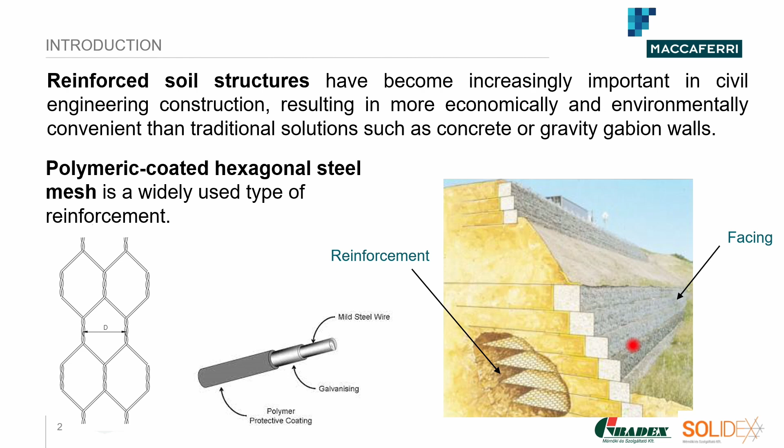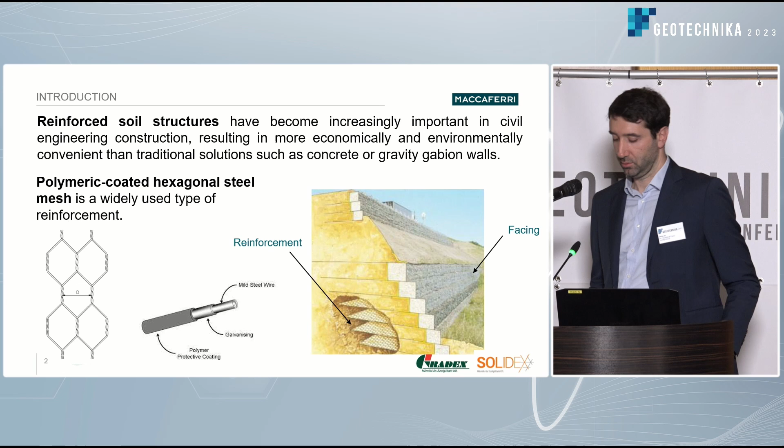The concept is to have elements which have a facing, and a reinforcement part to stabilize the soil, connected to the facing.

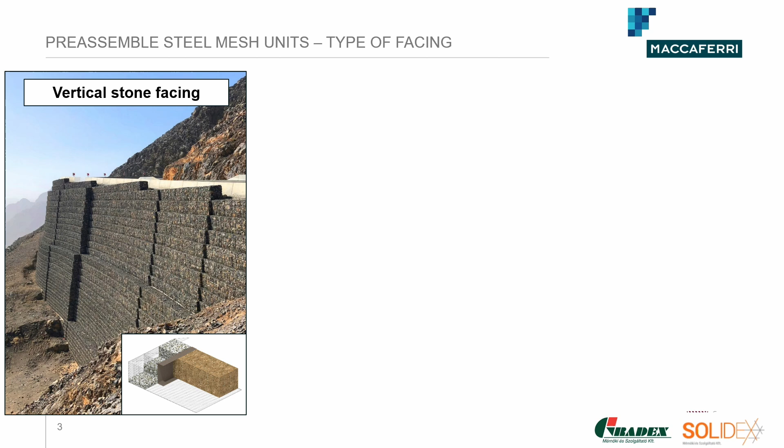Different kinds of facing can be built, such as vertical stone facing like gabion.

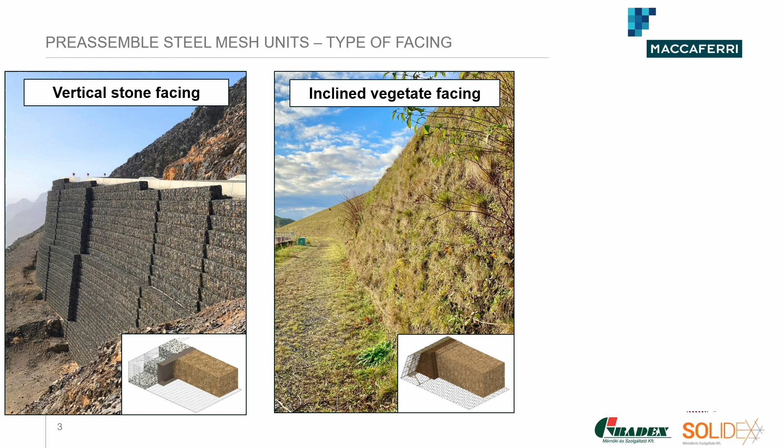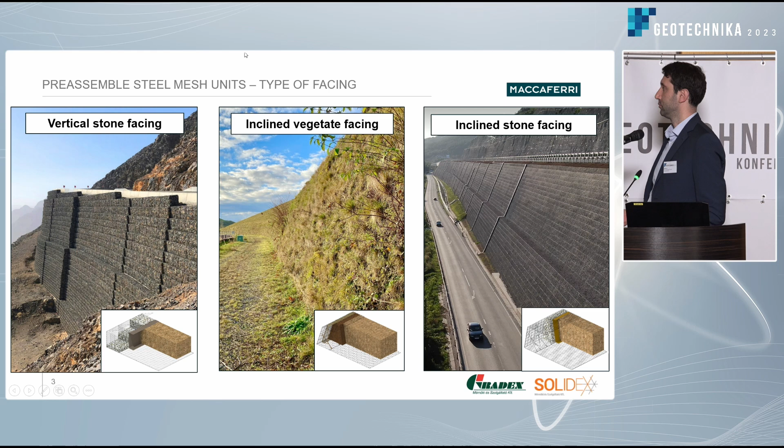And when the aesthetic purpose requires it, we build an inclined retaining wall with stone facing. So those units are made this way for vertical gabion facing.

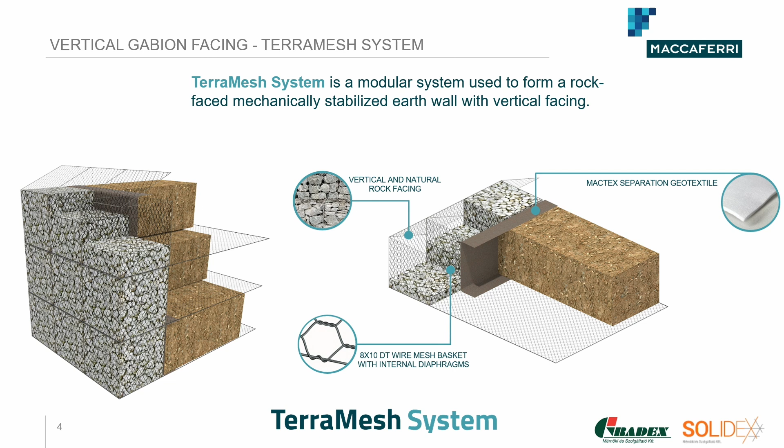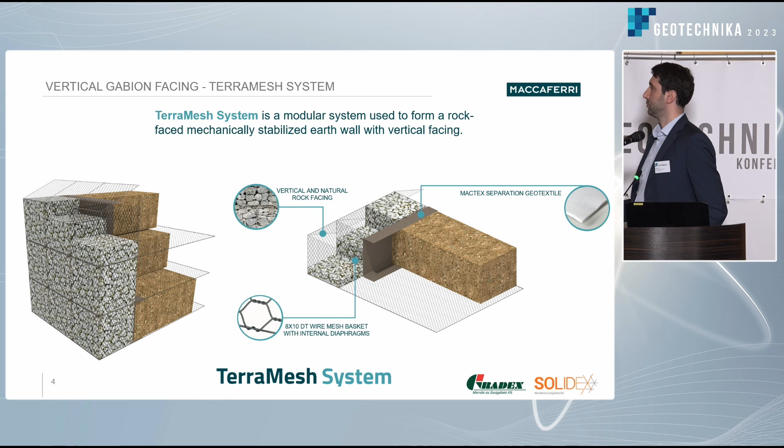A geotextile is also always needed here for separation between the backfill and the stone filling.

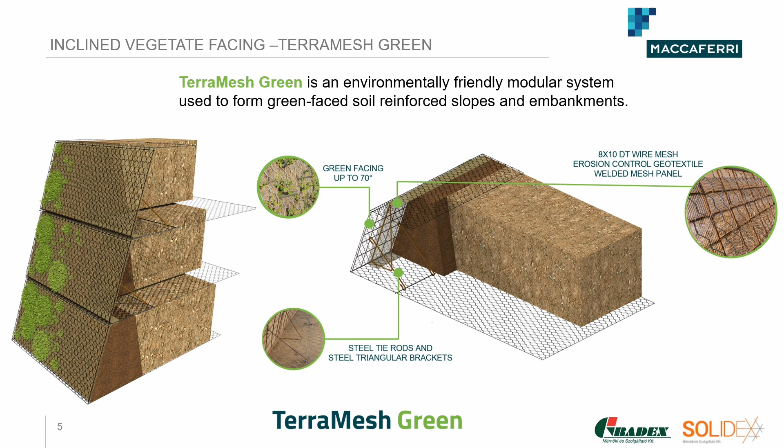In the facing, an additional welded mesh panel, ties and triangles are used to keep the inclination of the facing in position.

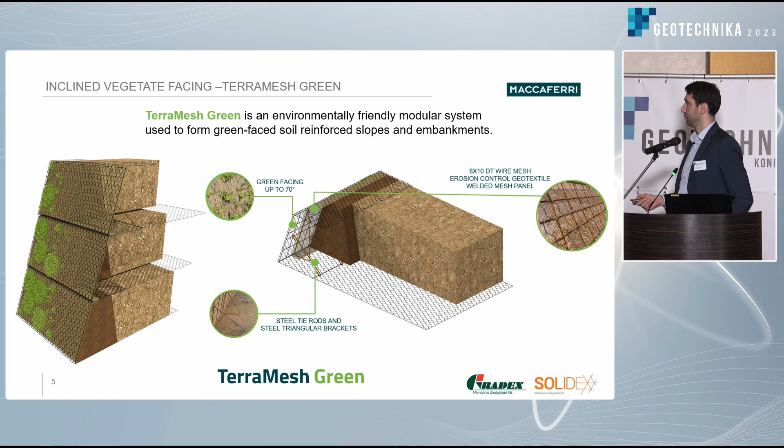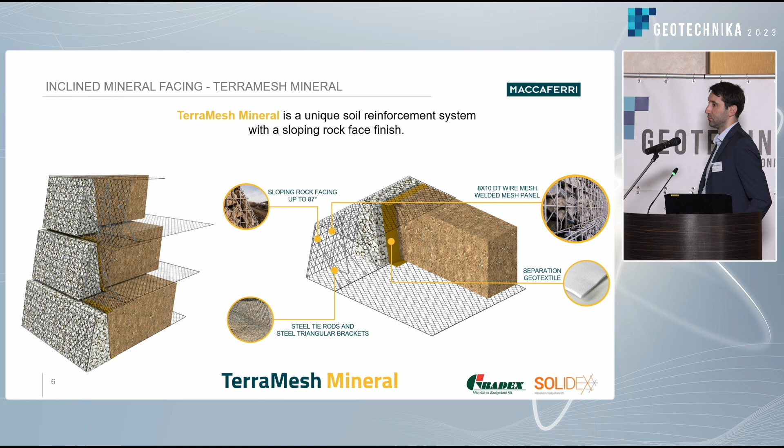The version with stone facing is very similar. The only difference is that the panel at the front is hot dip galvanized for aesthetical reasons, with a hot-dip galvanized auxiliary reinforcing grid built into the facing.

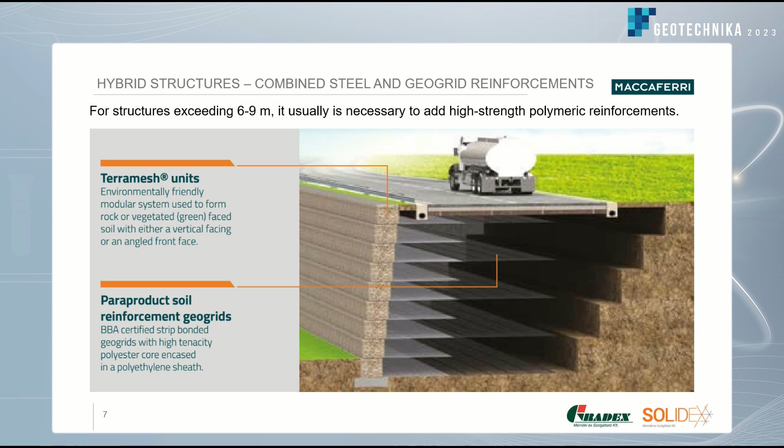For structures exceeding 6-9 meters of height, it is usually necessary to integrate with high strength geogrid as horizontal reinforcement elements.

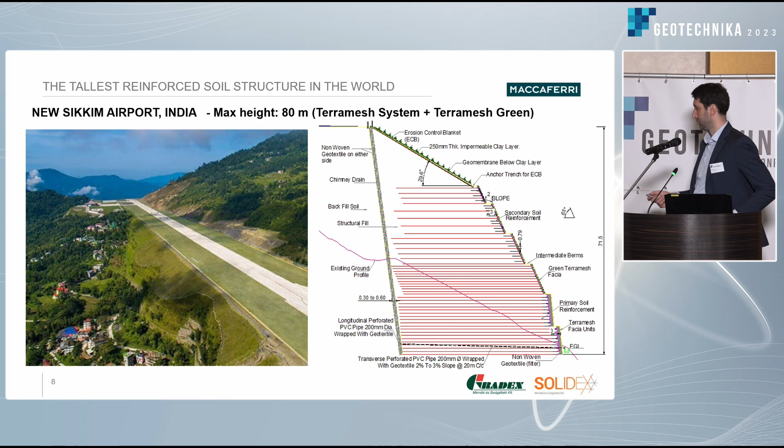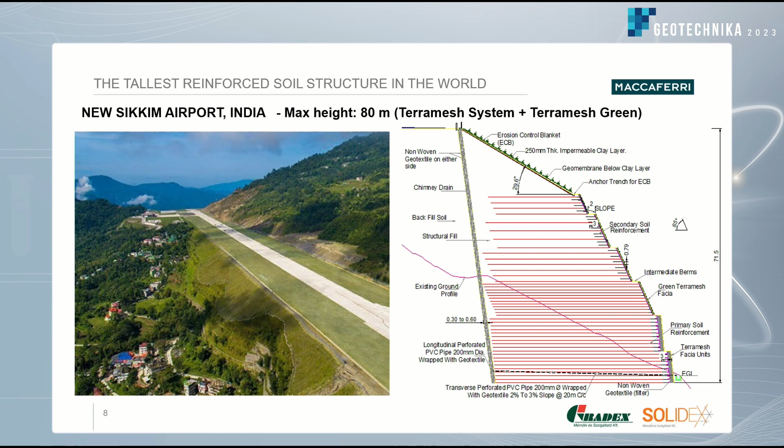With this technology has been built the tallest reinforced soil structure in the world. It is an airport in India and it is 80 meters tall.

And also the tallest such structure in Europe, located in Albania, is 37 meters tall at its highest point.

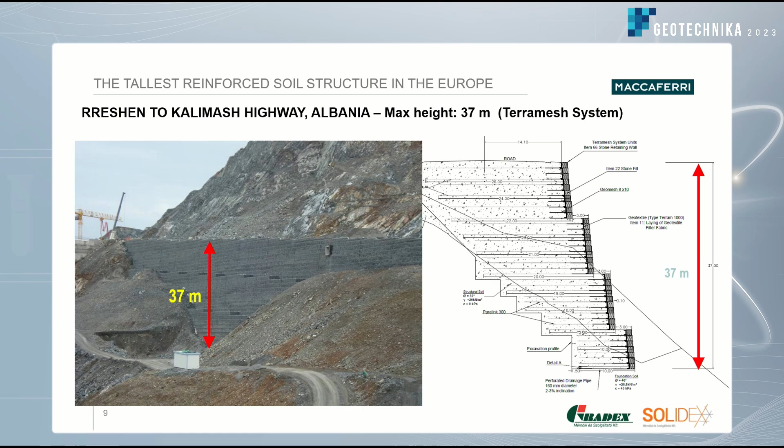What about the product certification in the European Union? Let's talk about the required product certification in the European Union.

Each manufacturer must obtain a European Technical Assessment, ETA.

And consequently can obtain the CE mark on the product.

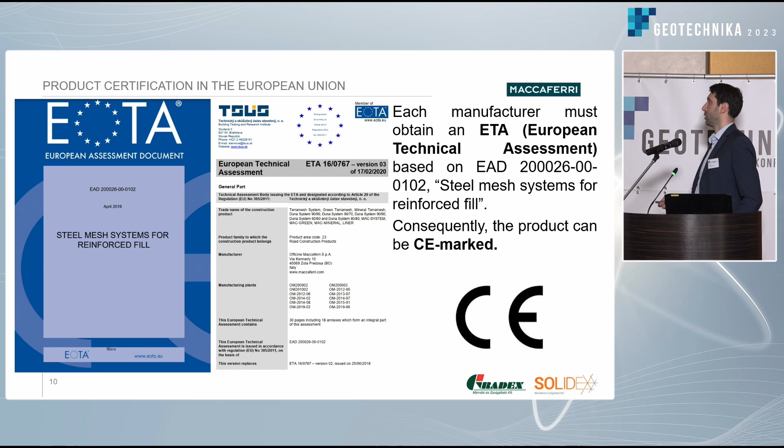About durability, the design life of steel wire products is defined according to a specific norm and standard requirements.

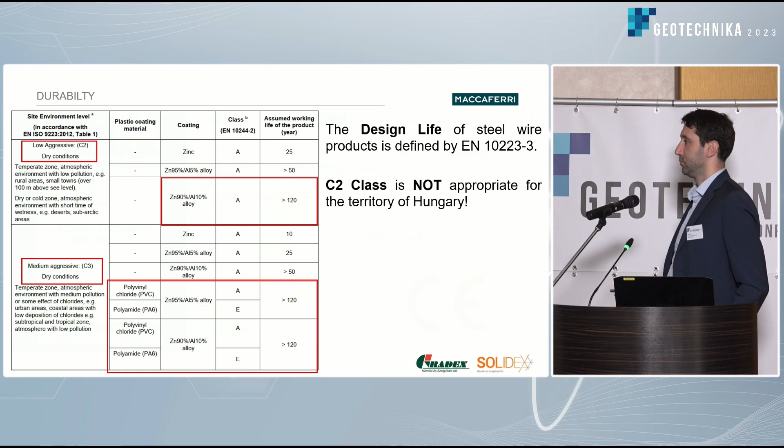From the distance it is in small letters, but the message is for long-term durability: it is always required to have polymeric coated, hot-dip galvanized wire mesh structures.

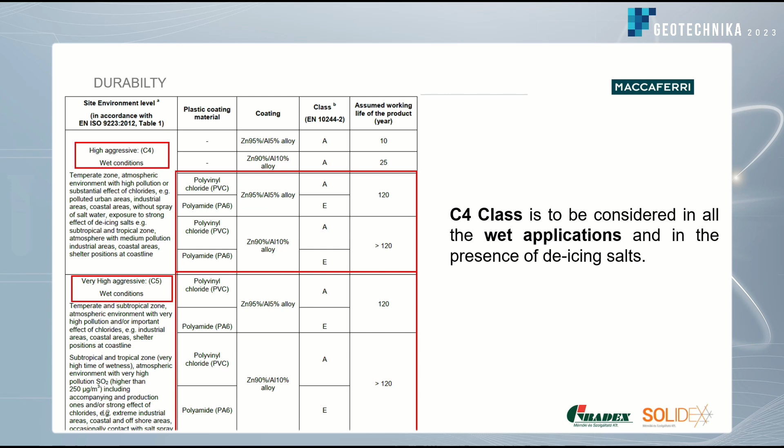Now the classes are defined in terms of between C2 and C5, based on soil aggressivity. The most proper class to be used, for example for infrastructures, is C4, that is the high aggressive class, which is typically characteristic for built structures.

Normative situation, state of the art. The standards which regulate the design of these structures - still in place is Eurocode 7, Geotechnical Design, issued in 2004.

But at that time it did not include a chapter or instruction for the design of reinforced soil structures, and no clear indication how to implement geosynthetics and steel reinforced mesh.

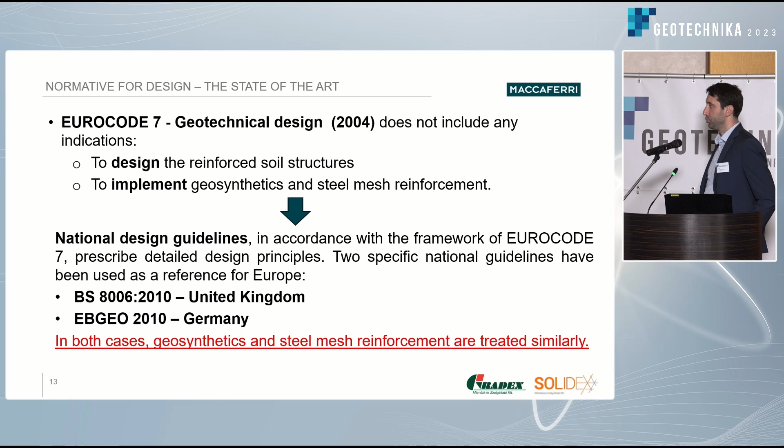Due to this normative gap, two special national guidelines have been issued and used as a reference in all Europe, within the boundaries of Eurocode principles: BS 8006 from the United Kingdom and EBGEO 2010 from Germany.

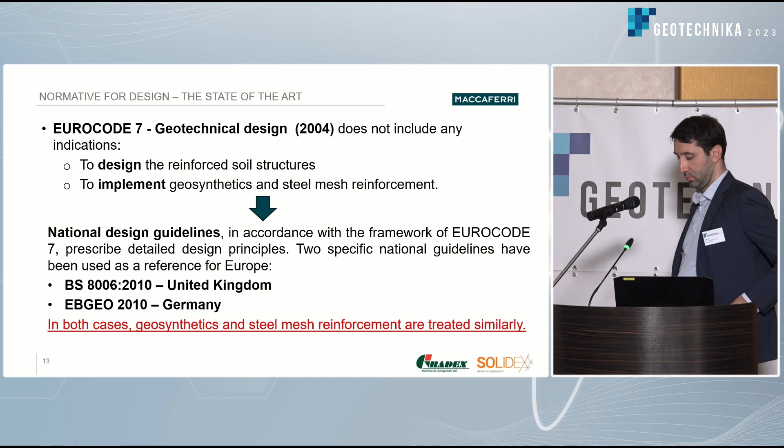They deal with geosynthetics and steel mesh reinforcement very similarly.

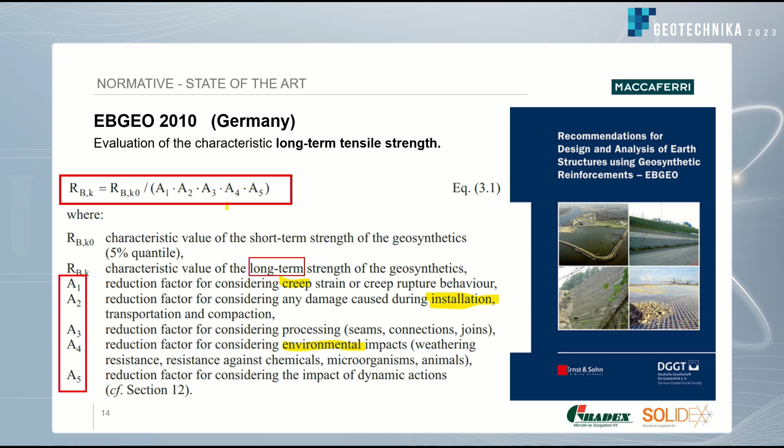The logic is that there is the definition of a long-term strength of the reinforcement, which is obtained from the tested short-term resistance of the material, by reducing this value with some coefficient, to take into account creep effect, installation damage, and environmental impact.

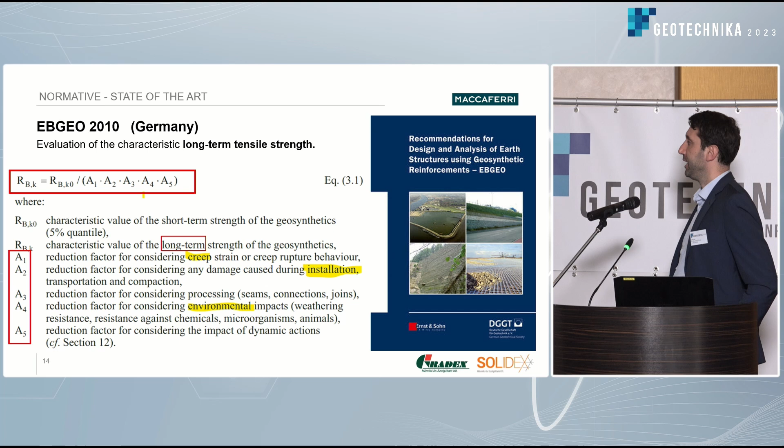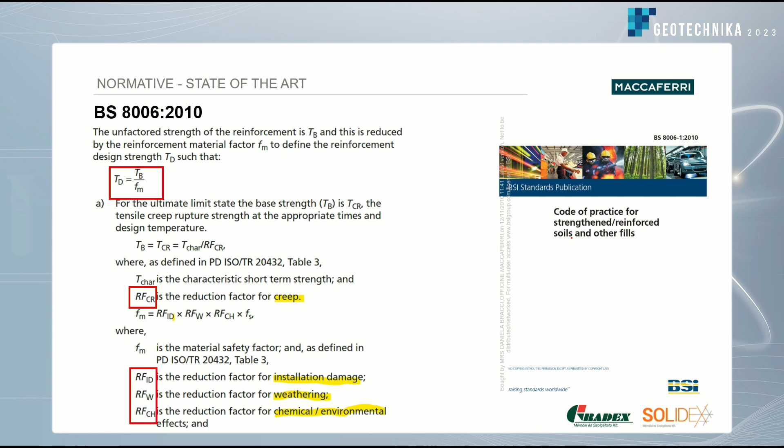That was EBGEO. This is the same with a different letter from BS 8006. Again we can see reduction factors for creep, installation damage, weathering, and chemical environmental effects.

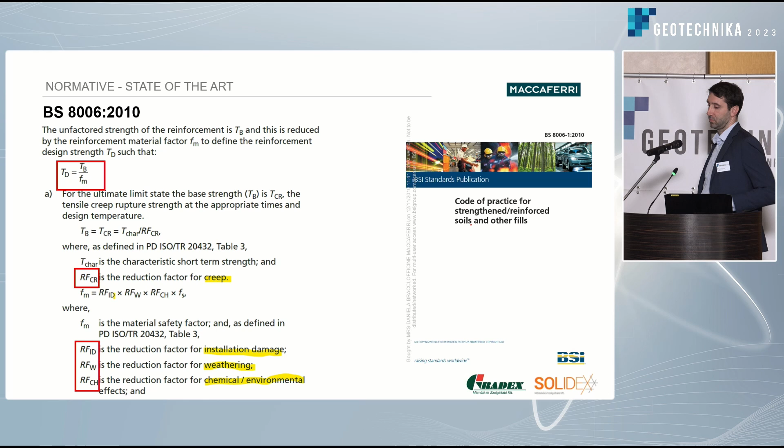Now, what is new is that in 2024 the new Eurocode 7 will be issued. This update of the norm will include both geosynthetics and also steel mesh reinforcement.

The differences are mainly two in the way they will be treated. Polymeric geosynthetics suffer from creep, steel doesn't.

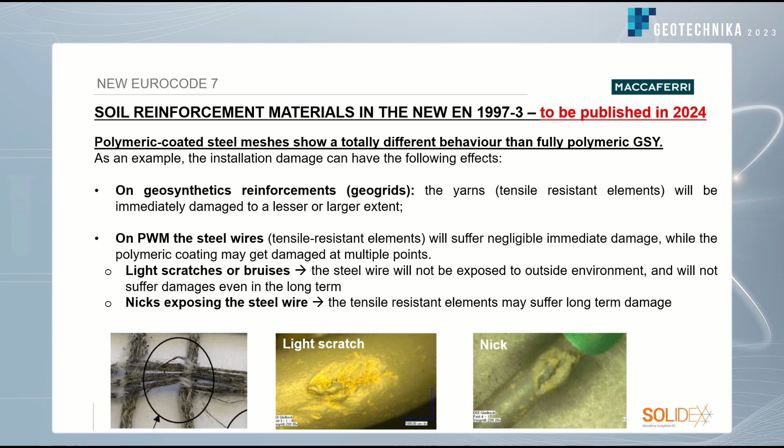Geogrids, woven geogrids, when they suffer damage during installation, the reduction in strength is immediate. The damage on steel mesh is only on the coating, so the reduction in strength occurs only after a long term.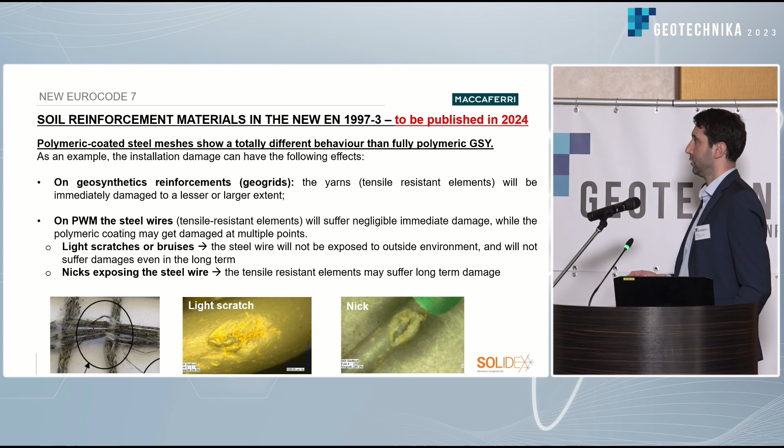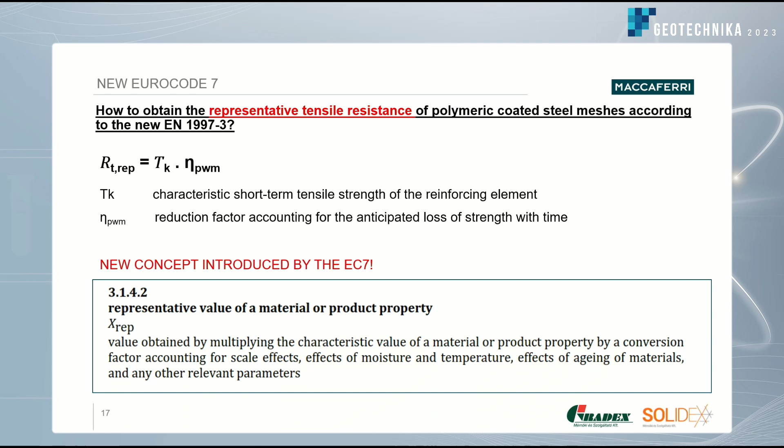So the new concept of representative value of a material is introduced in the new Eurocode.

For each material, this representative value is the product between the short-term tensile strength value, the one obtained from a tensile test, multiplied by a factor that takes into account the anticipated loss of strength with time.

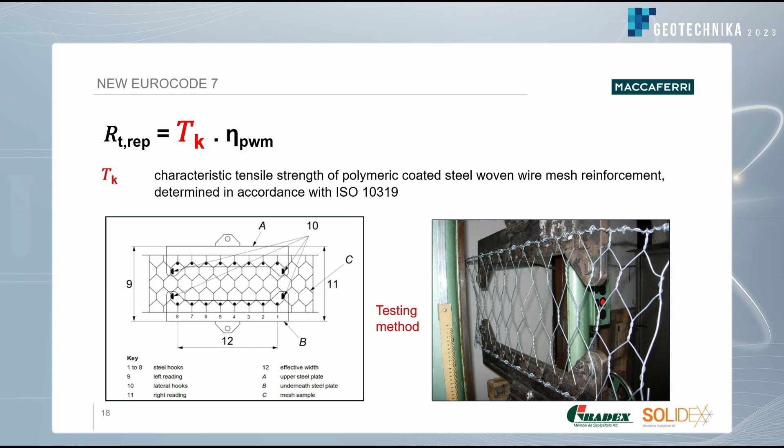And the testing procedure is described in the norm, of course.

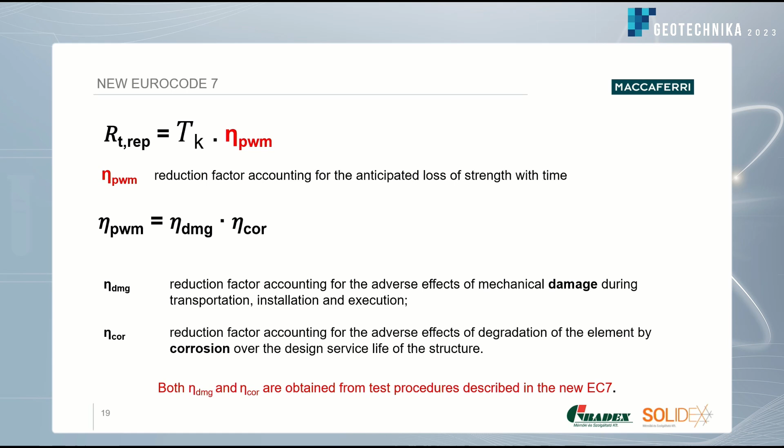The other factor reducing the characteristic value is the product of two different effects: mechanical damage during transportation, installation and implementation in the project, and the adverse effect of degradation due to corrosion during the design life of the structure.

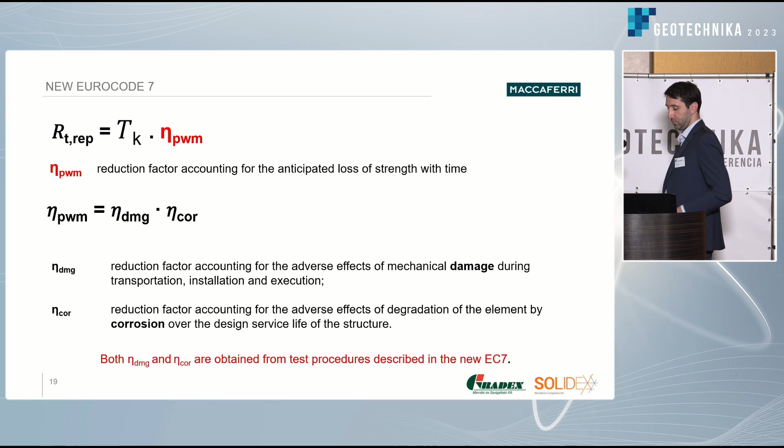Clear procedures for their evaluation are described in the new Eurocode.

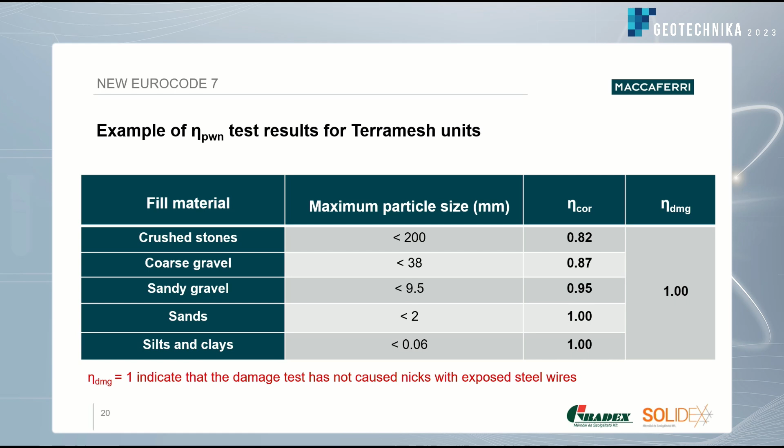A quick comment about the guidelines issued by neighboring countries like Czech Republic and Slovakia, again to fill the normative gap that existed due to the incompleteness of the previous Eurocode.

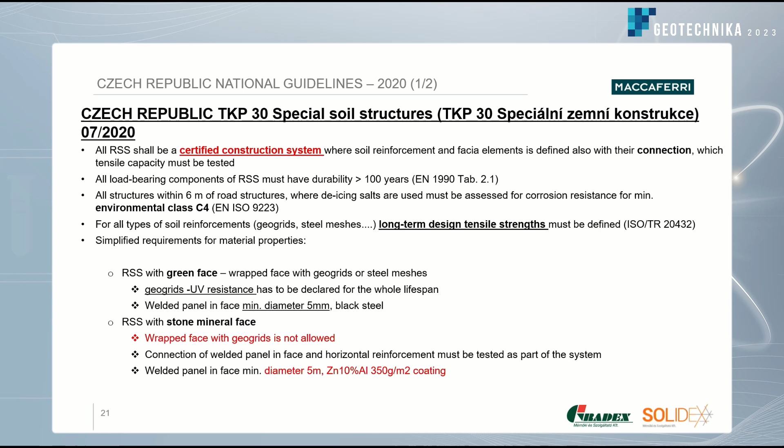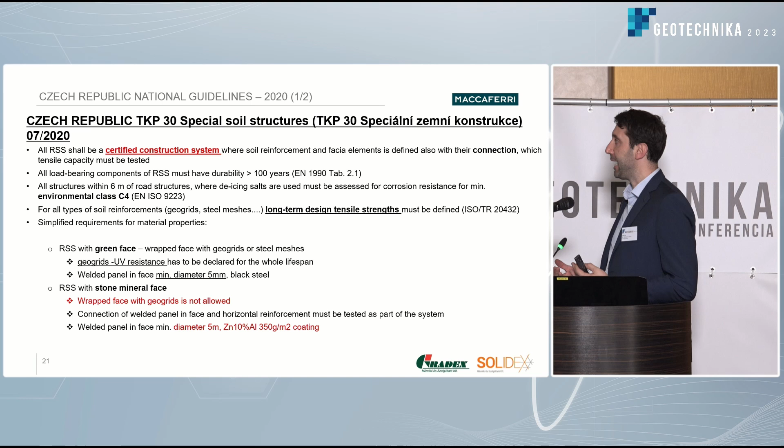Then all the elements composing the system should be proven for a durability higher or equal to 100 years.

Also, in the proximity of 6 meters to the road structure, the environmental class is C4, meaning highly aggressive because of the impact of de-icing salt normally used in winter.

Again, the resistance of each component should be considered in long-term terms, accounting for all degradation effects over time, such as creep, installation damage, etc., which must be taken into account for every element of the system.

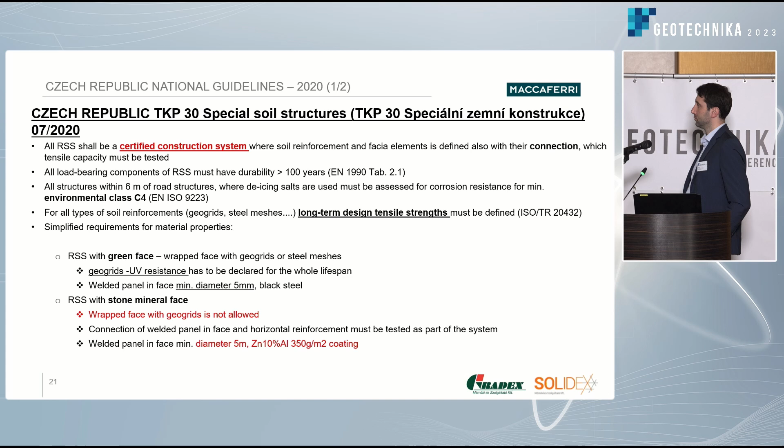As a result of all these requirements, for reinforced soil structures with green facing, it is required to prove the UV resistance of the polymeric geogrids in the facing for the entire structural lifetime.

For reinforced structures with mineral facing, facing with geogrids exposed to the environment and sun is not allowed. For stone or gabion-faced structures, it is forbidden to use geosynthetics where they would be exposed to UV radiation.

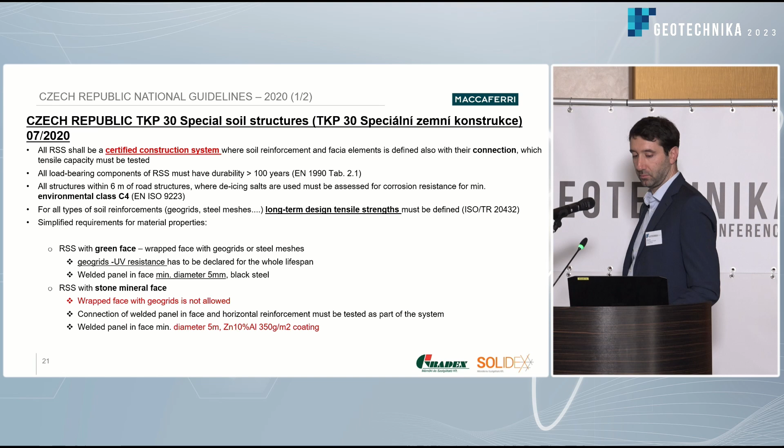The efficiency between the facing elements, gabions or whatever, and the reinforcement should be proven.

In addition, I would like to highlight that authorities have made a requirement in terms of corrosion protection to use the best possible available materials in the market.

This means that for welded gabions in Czech Republic, a zinc-aluminum 10% alloy metallic coating is required, at a minimum thickness of 350 g/m² for welded steel facing structures.

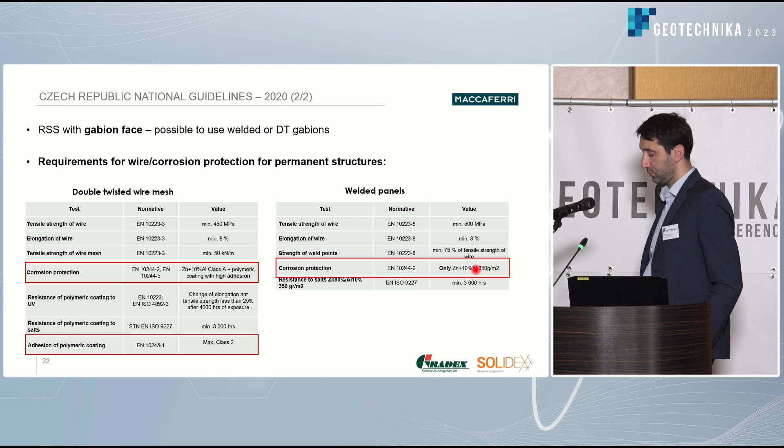For double twisted wire mesh, the coating should be zinc-aluminum 10% alloy plus a high adhesion polymeric coating. This is a very demanding requirement.

There are only 2 producers in the world capable of producing this quality of wire.

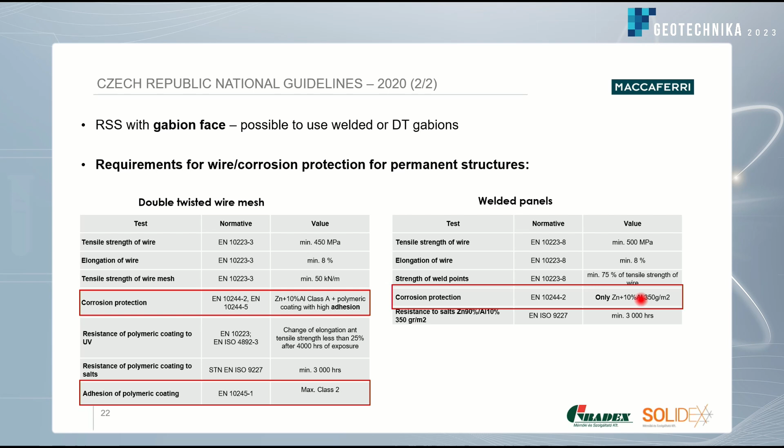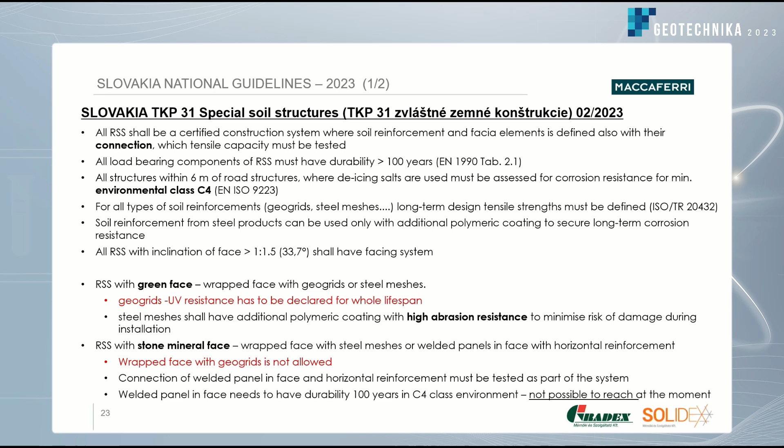A very similar approach applies in Slovakia. I can only add the requirement that in Slovakia, when the inclination of the slope exceeds 1:1.5, that is about 33.7 degrees, facing elements are required.

Also in Slovakia, a high abrasion resistance polymeric coating is required on the installed reinforcement elements, to minimize the risk of damage during installation.

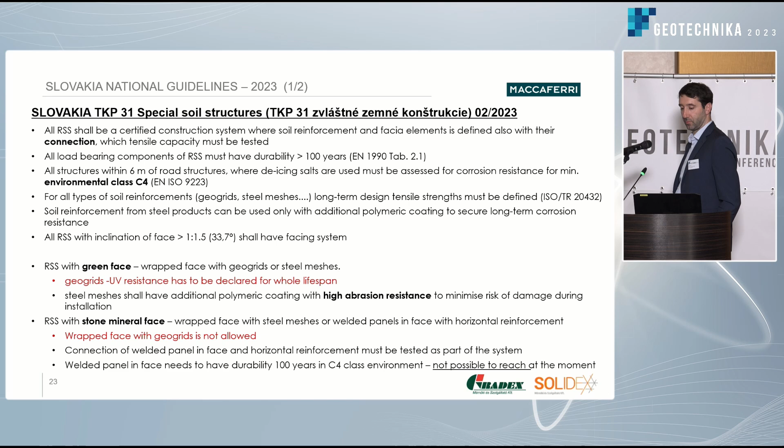So, let's now see what was done in Hungary.

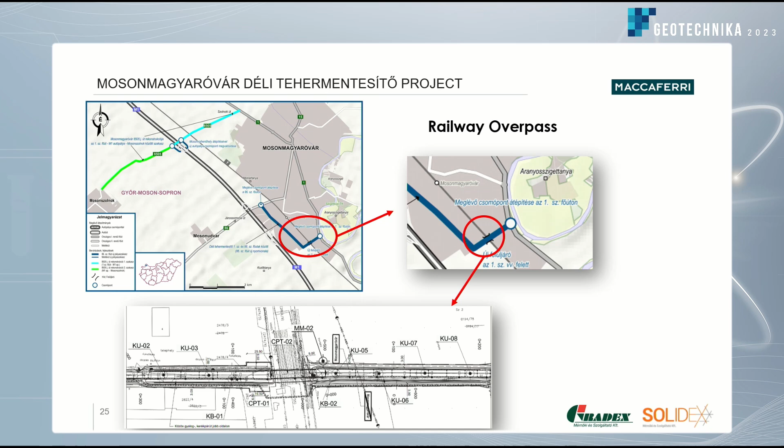In 2022, together with our partners Solidex and Gradex, we delivered a project in Mosonmagyaróvár, for the southern bypass.

From general to particular, here there is the road overpassing the railway. This is the road that passes above the existing railway line.

Here we have a ramp, an overpass made of a ramp, a vertical wall with a ramp. A concrete bridge, and then a ramp to go down.

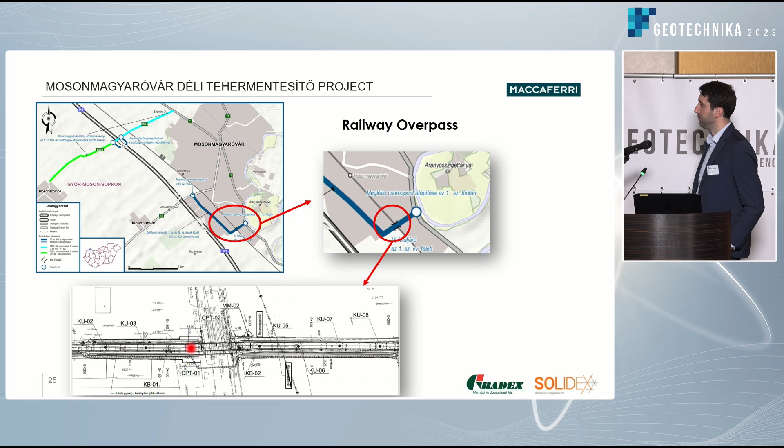Yeah, here we see it better. This is the two sides of the same ramp.

One ramp was 120 meters long, maximum height 11 meters. The second one is 175 meters.

In orange you can see highlighted the face, the gabion facing of the structure.

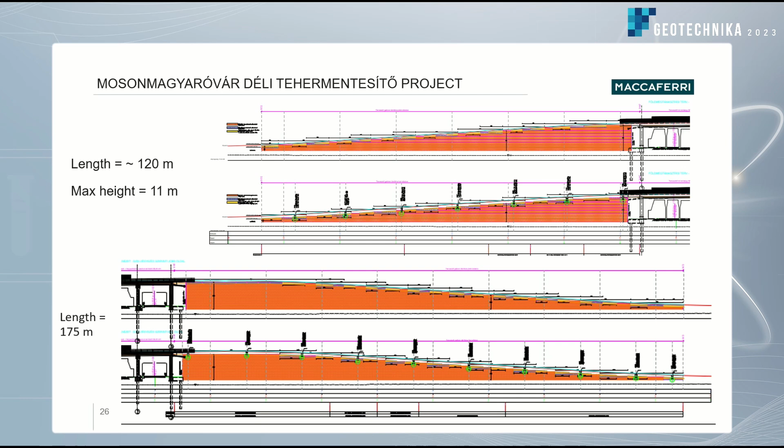This is the typical cross section.

Terramesh system, these gabion facing elements with steel reinforcement mesh, plus geogrid crossing the structure from one side to the other.

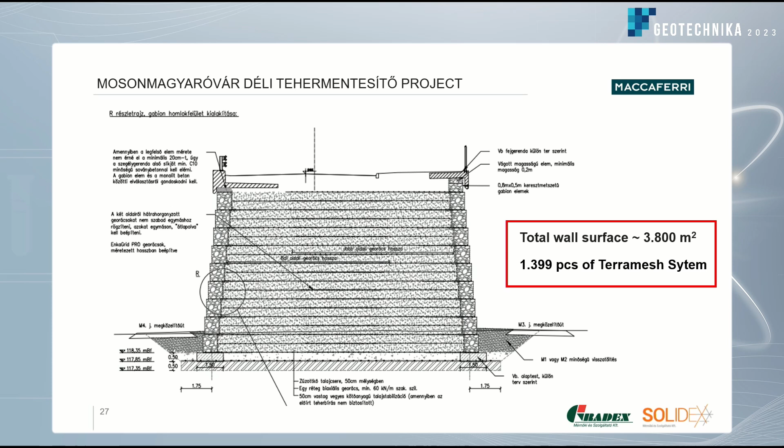The total wall surface amounted to 3,800 square meters, and almost 1,400 pieces of the Terramesh system.

This is the sketch of the units used for construction. Most of the units were 3 meters wide.

The gabion box 80 centimeters wide, the length of the reinforcement 2.5 meters, and 1 meter high.

With a partition of the box inside the box every meter. Here the detail of the reinforcement.

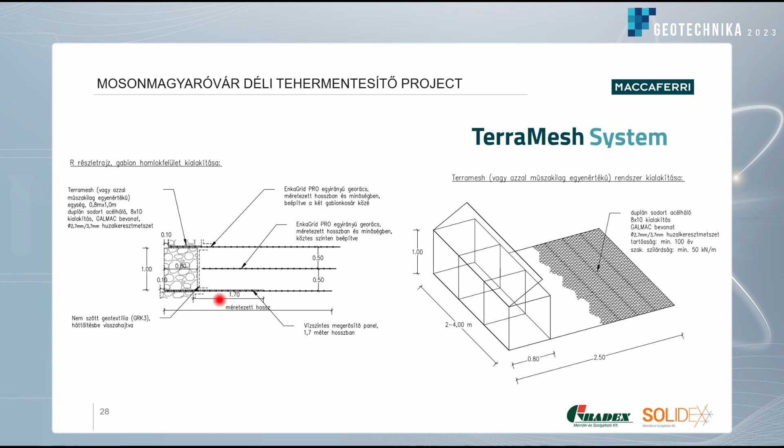This is 1 meter, on the 1 meter high facing. Here we have the gabion box. We don't see it well, but here at the bottom there is the steel mesh.

And this thicker one is the geogrid, that passes below the elements, reaching out to the facing.

And here, where of course the element is 1 meter, it arrives just against the box, while the intermediate geogrid only reaches the back wall.

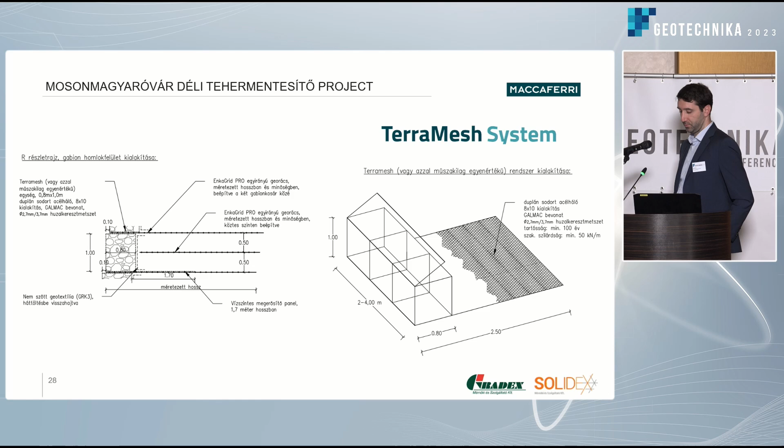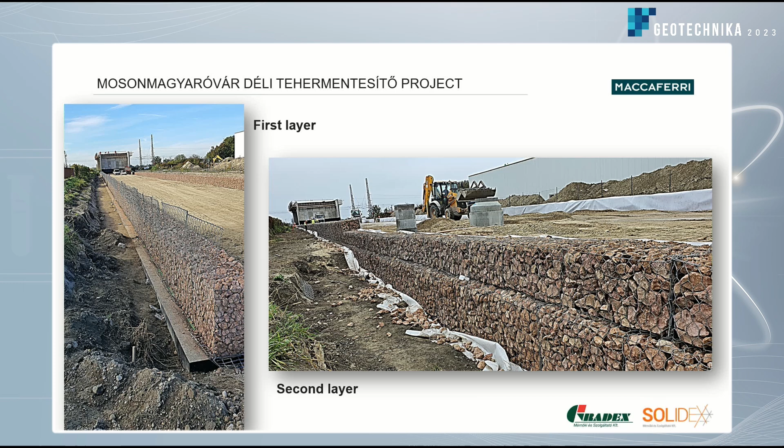Here you can see the concrete bridge support structure. You can also see the geotextile that is used to separate the stone from the fine filling of the bank.

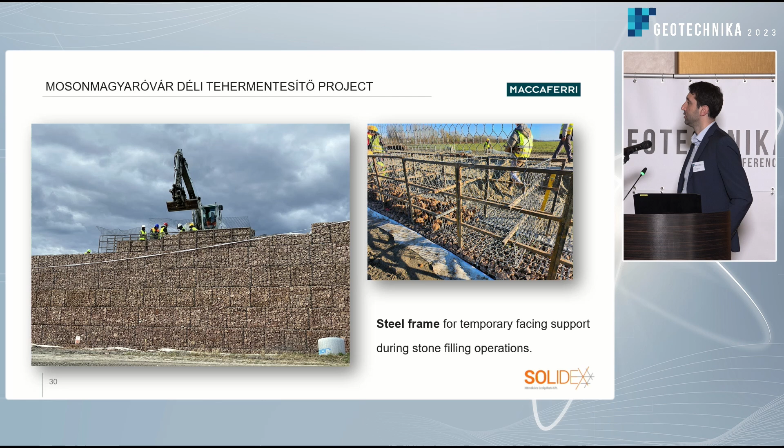Here you can see a process during the installation. The workers have installed a temporary steel frame to support the gabion facing during installation.

And install the stones and make the facing straight and pleasant, which helps create a straight facade.

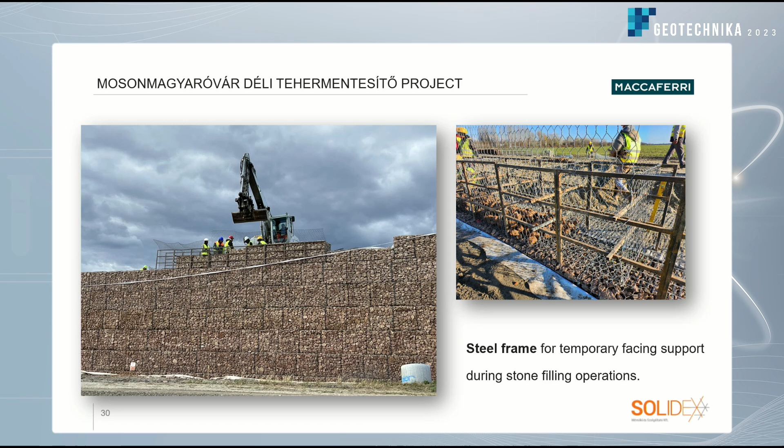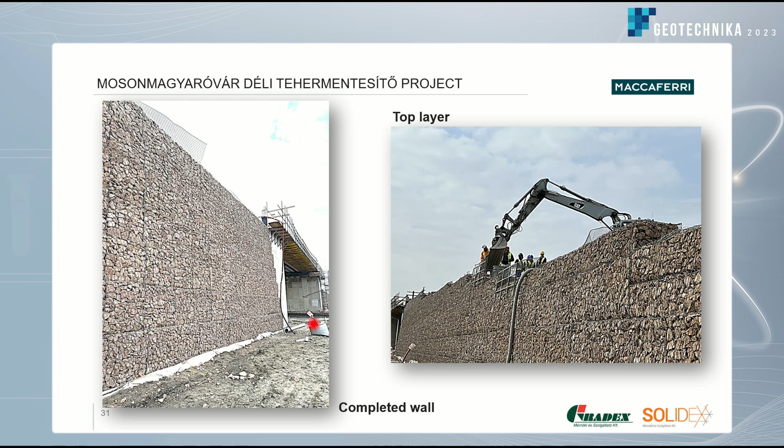And this is the result. You see here, this is the maximum height. You see here the concrete bridge, with the wall resulting in a very nice aesthetical finish.